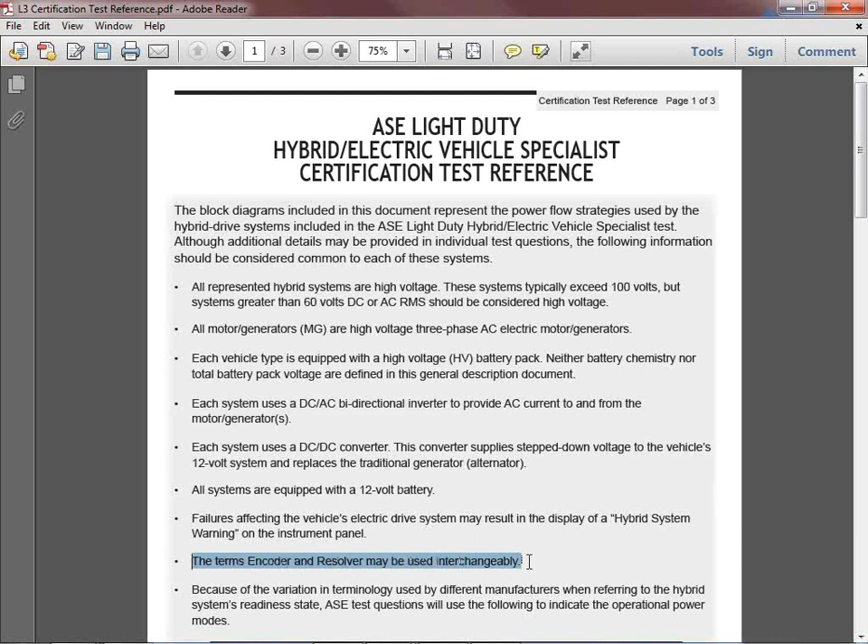Another standard that we realized during development was the fact that the terms encoder and resolver are sometimes used interchangeably because of the terminology among manufacturers. So we wanted to state that up front, that resolver and encoder may be used interchangeably when you see those in a test question.

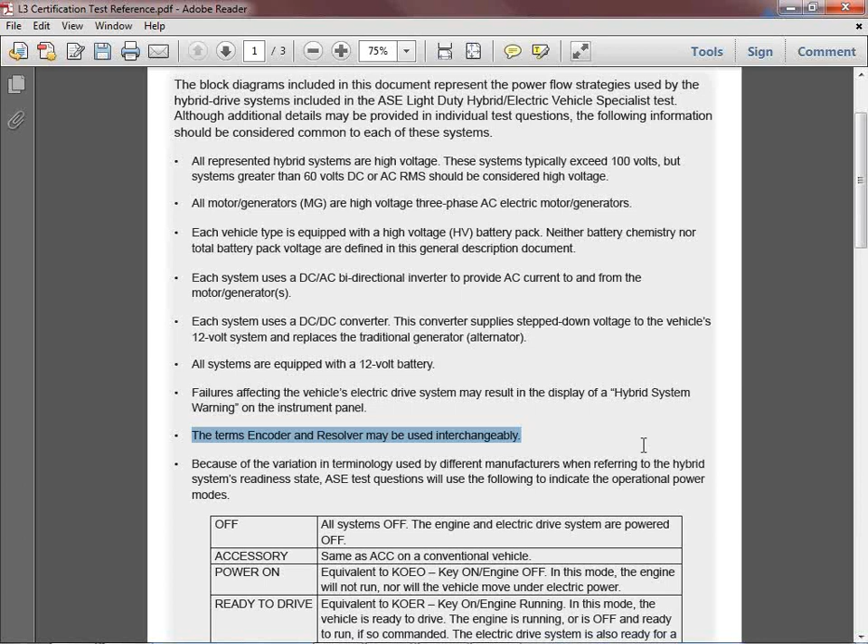Another great example of one of the challenges we faced, and I'm going to scroll down here so you can take a look at this table. This is a real good example of something that we faced that should have been fairly simple, but it wasn't so simple. The term 'ready' or 'ready on' is used differently by various manufacturers to identify the vehicle's operational power mode.

That mode is determined by, for lack of a better way to characterize it, the key position. Key on, engine off; key on, engine running. So what we had to do was put together a matrix and develop a standard to clarify this disparity, so that technicians taking the ASE test could understand what operational power mode the vehicle's in when we're making certain diagnoses of vehicles' problems in the test questions.

So what you see here are the terms that we're going to use in the ASE test. Off is off in this table - all systems are off, and the engine and electric drive system are powered off. Accessory is the same as an accessory in a conventional vehicle.

Now, power on, that's kind of equivalent to key on, engine off. In this mode, the engine will not run, nor will the vehicle move under electric power.

Our ready, or ready on, is ready to drive - that's how we're going to characterize the vehicle, and that's equivalent to key on, engine running. In this mode, the vehicle is ready to drive; either the engine is running or it's off and ready to run if so commanded. The electric drive system is also ready if a drive command is given.

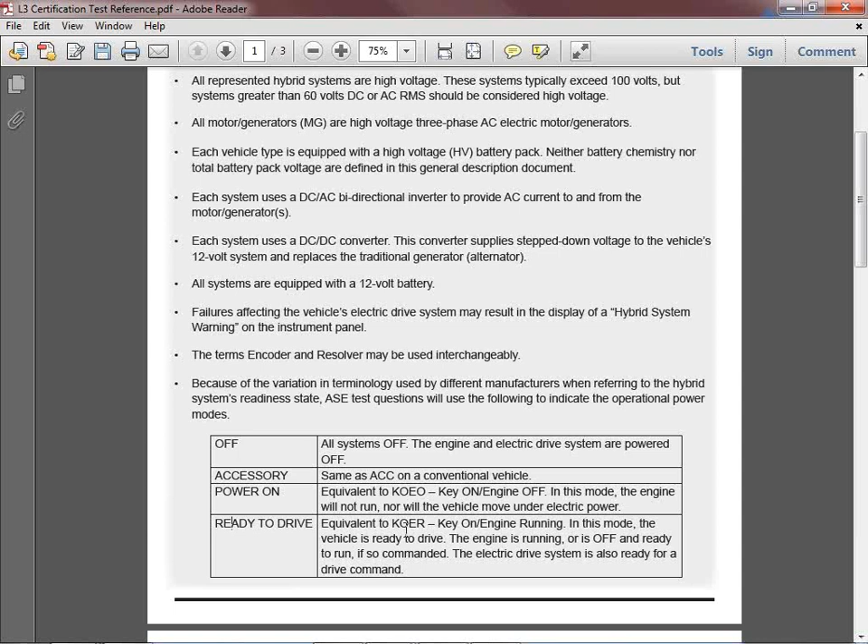Now, on page 2 - and again, this document's 3 pages, basically broken down in 3 parts - the second part of this are the block diagrams. These block diagrams serve as a visual reference and identify a classification for each of the vehicle platforms based on their technical characteristics.

Now, these classifications will be used in some of the test questions to define the hybrid vehicle type in the diagnostic or repair scenario, and that allows us to do that without calling out the name of the actual vehicle manufacturer. Technicians familiar with the hybrid technology should recognize the systems represented.

So if you were to read through the type 1 and look at this block diagram, you'd realize very quickly that, oh hey, that could apply to Toyota or Ford or even Nissan Altima. The idea is to give you a way to determine exactly what is a type 1 vehicle when ASE talks about it.

Now, one of the important things that I want everyone to understand is these block diagrams are in no way intended to offer you enough technical information about their operational characteristics in order to help you answer test questions - kind of like the composite vehicle reference booklet does for anyone that's taken the L1 or L2 test. These block diagrams simply identify the technical aspects for a given type of hybrid vehicle so you can understand which type of hybrid vehicle is represented if we cite a type of vehicle in a given test question.

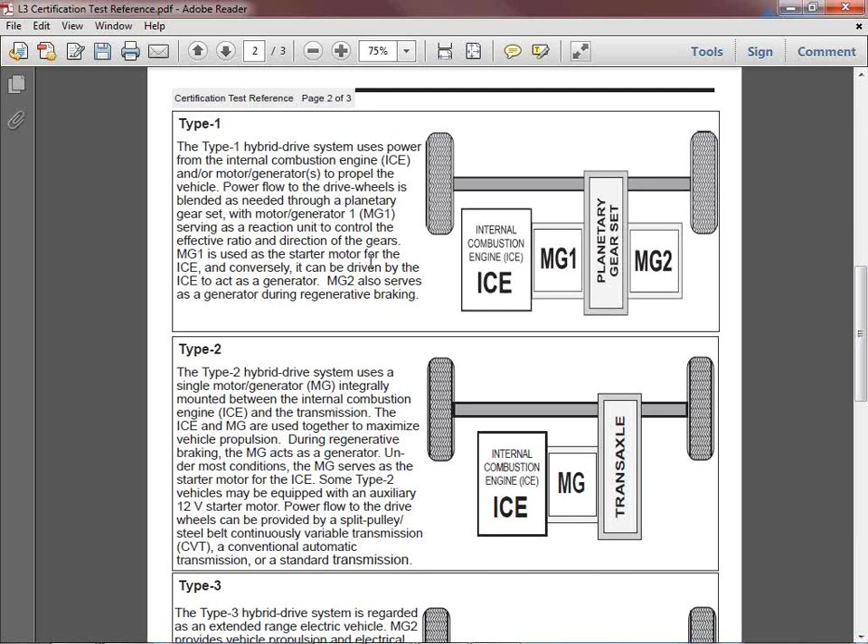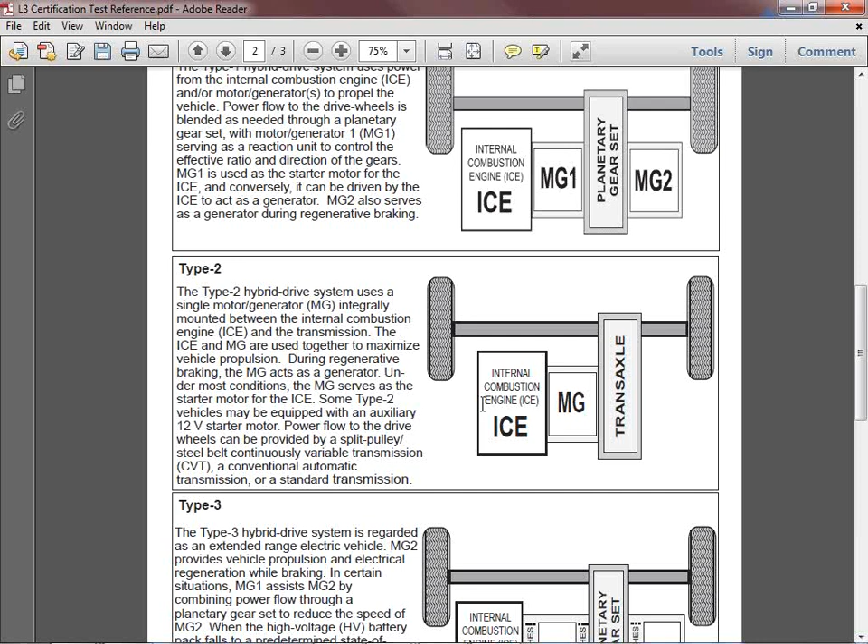But again, reading through type 1, I'm just going to give you a quick overview. Type 1 applies to Toyota, Ford, Nissan Altima, if you're familiar with those types. If you read through type 2 and look at the configuration, you'll see that's really an IMA-style Honda, Mercedes-Benz, BMW, and even Nissan is starting to use IMA as well. And then when you look at and read through Type 3, you'll see that really what we're referring to is the Chevy Volt - that type of hybrid configuration.

Now, what I want you to understand though is you will see mostly generic test questions. You'll see the majority of the questions will be generic on the test, meaning that the content will apply to most any type of hybrid vehicle. However, there will be some test questions - a sprinkling of them - that will only apply to one of these single types, which will be indicated in the test question.

So if you've taken ASE test questions, you would understand a scenario that I'm going to use right now. We'd create a test question that would read something like: the technician is diagnosing a motor generator failure on a Type 2 hybrid electric vehicle. So we've identified a diagnostic scenario that's specific to a Type 2 vehicle. That would require you to apply your knowledge of type 2 to that diagnostic scenario and arrive at a conclusion based on your overall knowledge of that type of diagnosis on a type 2.

There will also be questions that reference an illustration provided with the test question, which you'll use to diagnose the scenario, just like you've seen in other ASE tests. These illustrations will be hybrid scenarios, but they'll help level the playing field for all technicians taking the L3 test, using that illustration coupled with your knowledge of the subject matter to arrive at your diagnosis. So that's how that's going to work.

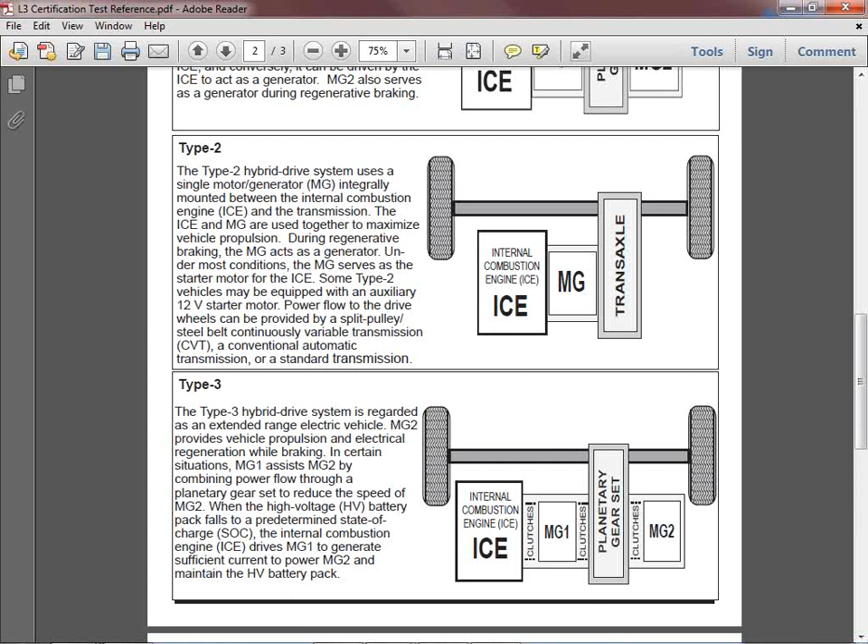The last part of the certification test reference document is a glossary of terms. The glossary can be used as a reference during testing in the event you encounter a term you don't clearly understand, primarily due to differences in how the term is used by various manufacturers. We compiled the terms in this glossary during our test question development, which was the best place to do it, because that's where we could best determine which terms technicians globally might struggle with.

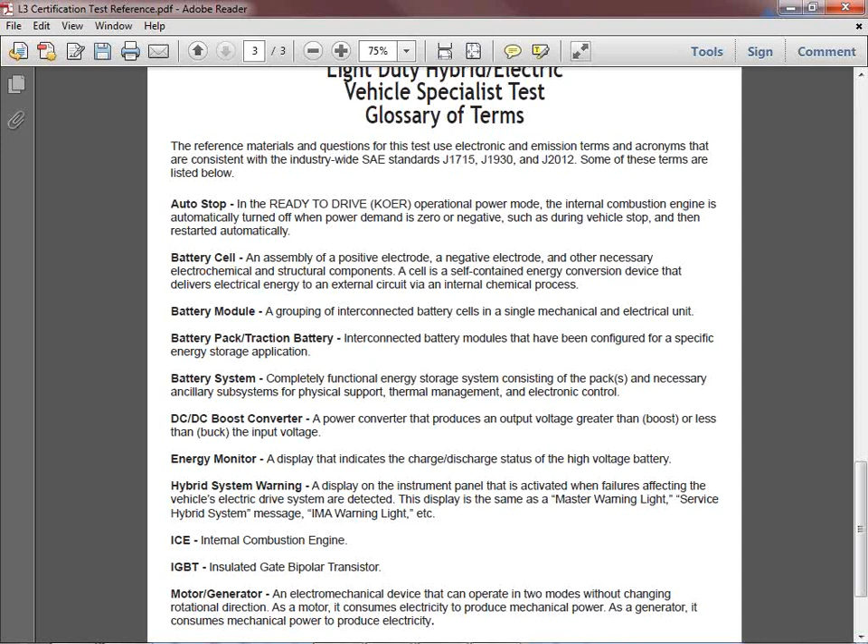So to help level the playing field for technicians taking this test, the certification test reference document will be available as a pop-up document in the computer-based testing user interface. It's also included in the official ASE L3 study guide, which I'll show you a little later and tell you how you can get your hands on one of them.

Now for test question content, I'll say we had great success writing generic questions that apply to the majority of manufacturers' hybrid vehicles. As I said, our subject matter experts concluded high voltage is high voltage, and whether it's 156 volts or 300 volts, it's all dangerous. The diagnostic and safety procedures are essentially similar for all manufacturers.

So as I already said, there'll be some type-specific questions included in the test, but the predominance will be generic. Just remember that all of the questions require the application of a high level of diagnosis and analysis skills, as should be the case for any advanced level test. So that's a little bit about the constructs of the test questions.

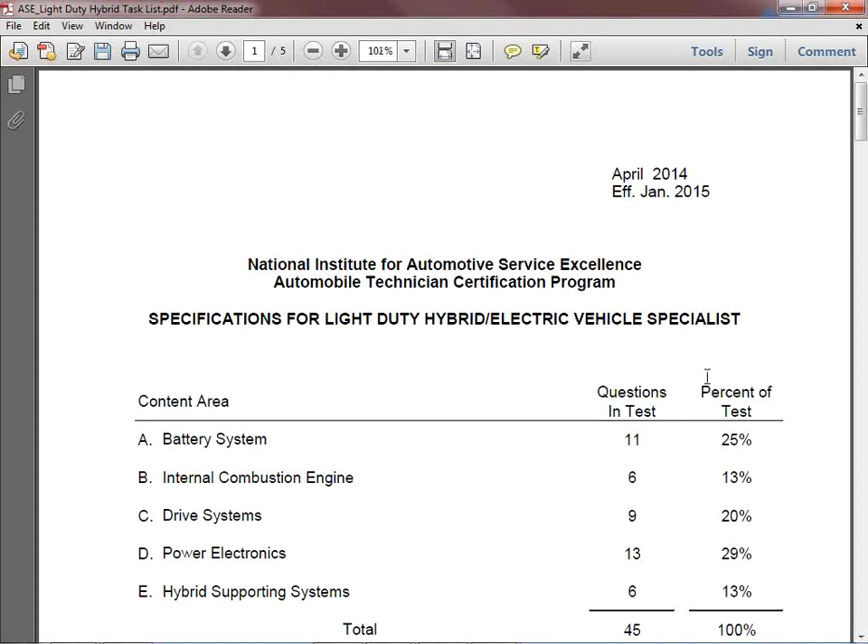Now let's take a look at the task list, and I want to go through this and give you some really good insight on how to use this task list to help with your test preparation efforts.

If you look at this first page, you'll see this is what we call the test specification, and anyone who's taken an ASE test knows that this kind of mimics your score report. With the test specification, we break the test down into general content areas, which identify a specific area of the test that has skills associated with it in diagnosis and repair, and we'll talk about those skills in a minute. In this test, we've broken it down into 5 content areas.

We have the battery system, the internal combustion engine, drive systems, power electronics, and hybrid supporting systems.

When this test goes fully operational, there will be 45 questions distributed across these content areas in this manner: 11 questions go to battery systems, 6 to internal combustion engine, 9 to drivetrain, 13 to power electronics, and 6 to hybrid supporting systems. Now isn't it ironic that when we focused on prevalent technology that makes hybrids the same, the 2 content areas that most affect that are the areas where we're going to apply the most questions. Just kind of makes sense that way.

It's important to note, though, the 45 questions applies to this test when it goes fully operational. Right now, we're offering the test in a pilot phase. The pilot test is being delivered starting January 1st, and it'll run through June. It's going to include 95 questions, with 3.5 hours of testing time allowed for completion of the pilot test and the 95 questions.

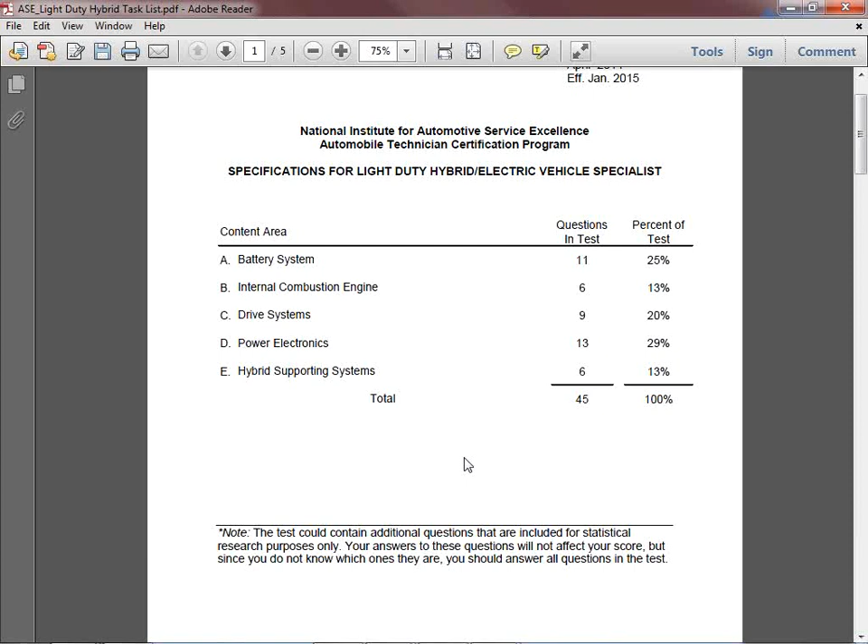Now what I want you to understand right now, we're going to talk a little bit more about that in detail in just a moment, but I want you to understand the information that's in a task list and how this information can help you better prepare yourself.

Now, what are tasks? When you look at each content area, like battery systems, within that content area we have 10 tasks. One of the things you'll notice with many content areas, primarily the ones dealing with the high voltage system, all but the internal combustion engine content area, the first 5 tasks are essentially the same. These are the safety tasks that apply to each area where you're working on high voltage.

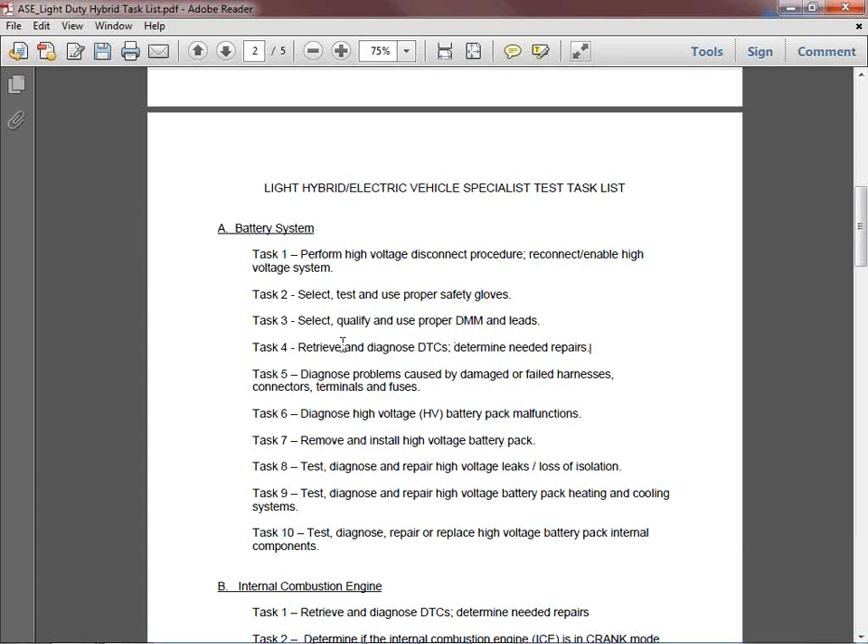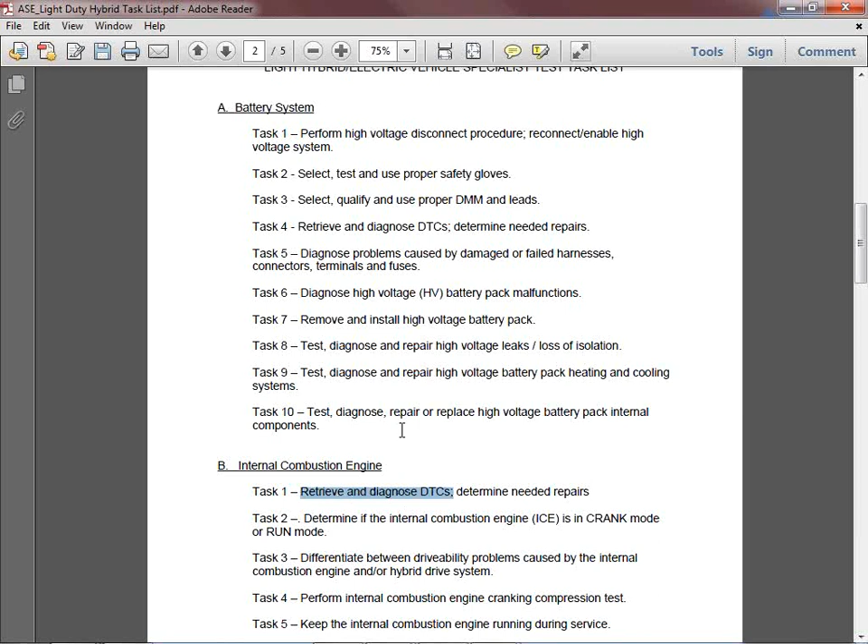Also, one of the common tasks is diagnostic trouble codes, because we could write a question about retrieving and diagnosing a diagnostic trouble code as it relates to the battery system, which would be different from retrieving and diagnosing one as it relates to the internal combustion engine. So when you see repetition of the task, there's a method to the madness here, each task really reflects the content that's going to be in that content area.

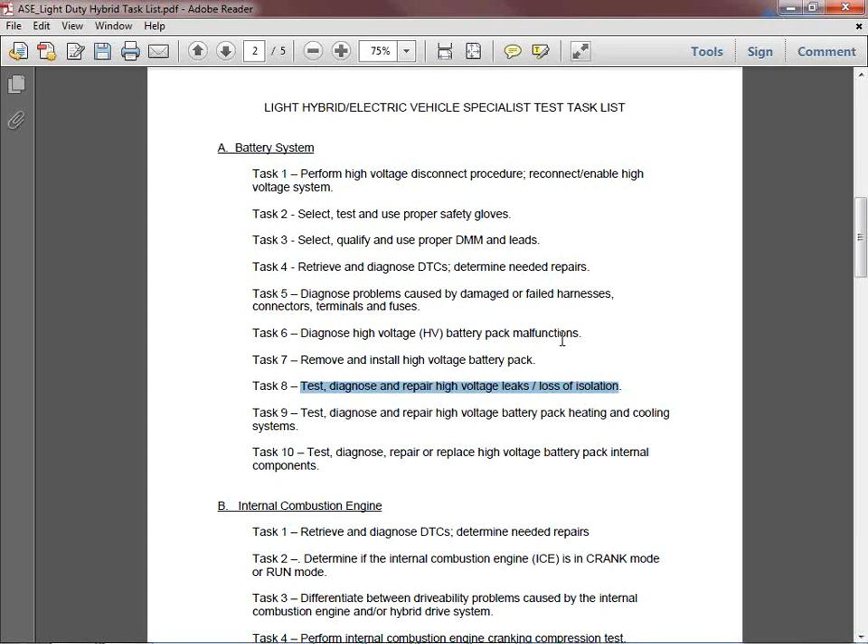So you need to get your head wrapped around the idea that there's multiple tasks, but what does that mean to this content area as it relates to battery systems? And most importantly, how much do I know about that? That's the key. Because if your self-evaluation says, wow, I don't know much about testing, diagnosing, and repairing high voltage leaks or loss of isolation, you've just identified a place where you probably need to brush up your skill set and get some experience. So the battery system, again, those 5 common tasks.

Now as we go through, we have tasks associated with the internal combustion engine. I want to point out just a couple of these. Again, as I mentioned, retrieving and diagnosing diagnostic trouble codes as it relates to the internal combustion engine is going to be specific to the ICE.

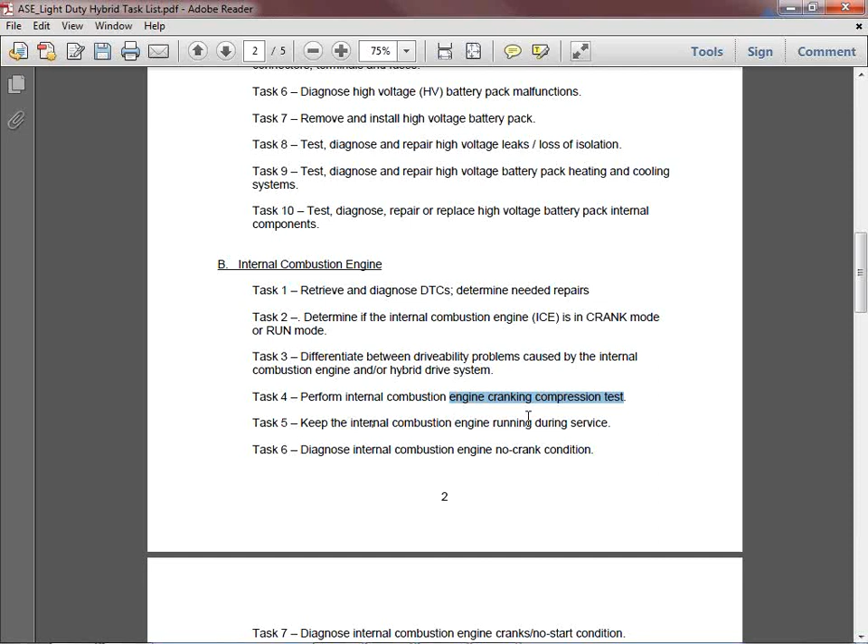There's a few tasks in here that you can go through and figure out whether you have a strength of knowledge in those areas: cranking compression test, checking and keeping the internal combustion engine running during service, diagnosing internal combustion engine no-crank conditions. One of the things I wanted to point out, interpret vacuum and compression readings on Atkinson cycle engines.

Okay, wow, what does that mean? Well, vacuum and compression readings on Atkinson cycle engines are different, and if you didn't know that, I just pointed out something you probably want to brush up on, because you might see a question about that on the test.

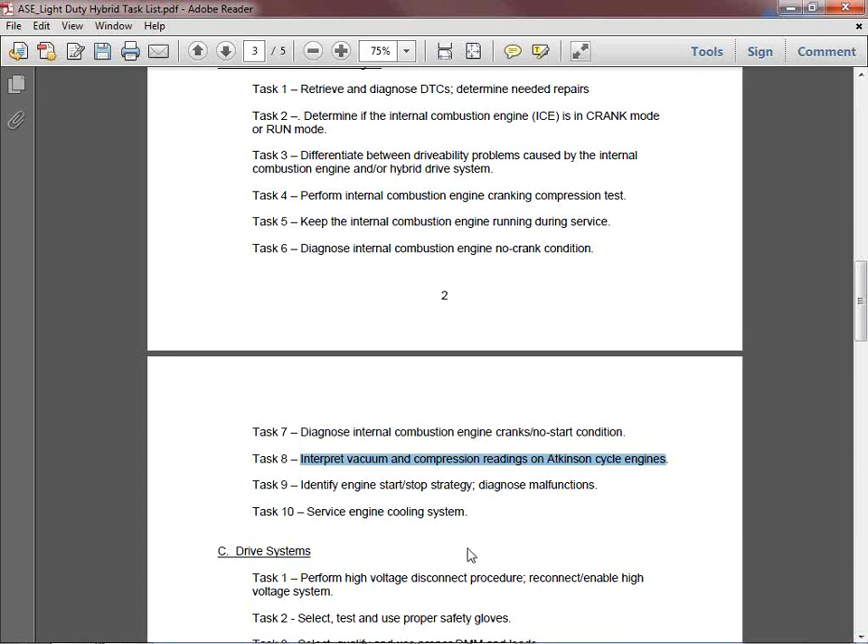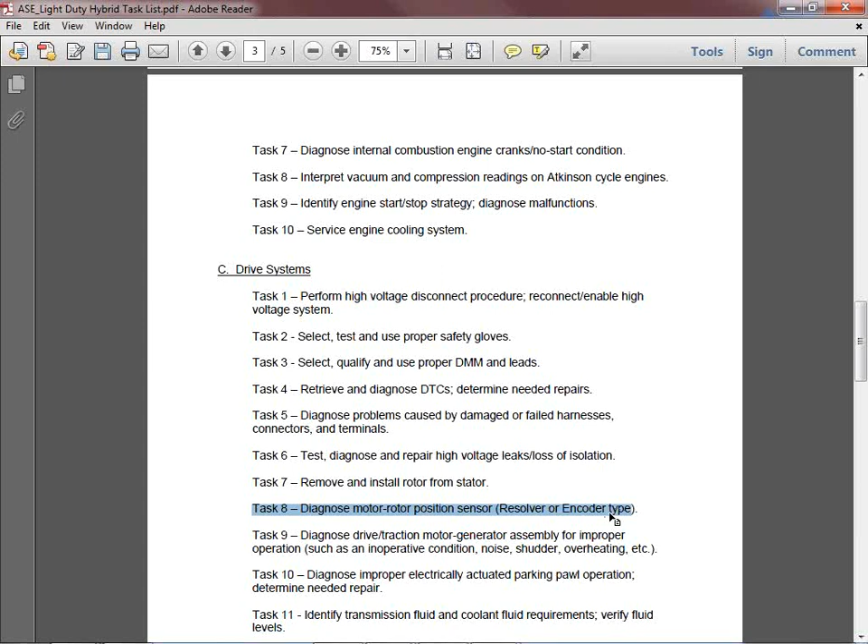Moving on to drive systems, the first 5 tasks in that task list are essentially similar to the battery system. We've got one task that reads diagnose motor rotor position sensor, resolver, encoder. That's that interchangeability of terminology we talked about already, and I wanted to point out how it might apply in a diagnostic scenario for a question we might give you. There are tasks covering all of the diagnosis and repair scenarios and skills that we as technicians should know and understand when working on the drive system.

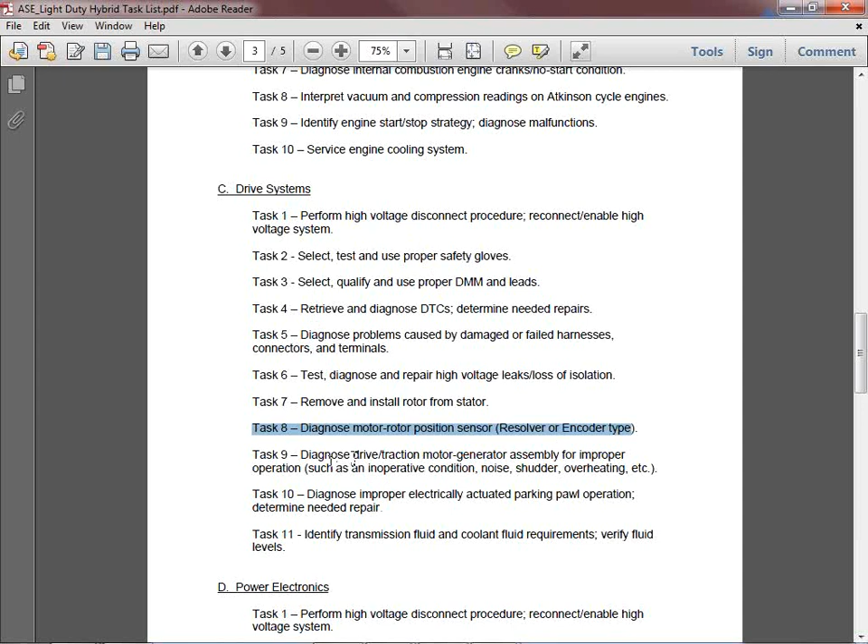Again, power electronics - the first 5 tasks there are essentially similar. This is one of the skills I wanted to point out, because this is where we get into that operational power mode that we talked about. Of course, we could be using the operational power modes in other content areas where we're diagnosing a problem that occurred in the power-on mode, or the ready-to-drive mode.

But this is an actual skill that reflects back to that table I showed you in the certification test reference document, and how it applies to the skills in the task list that the questions in the test are going to relate to.

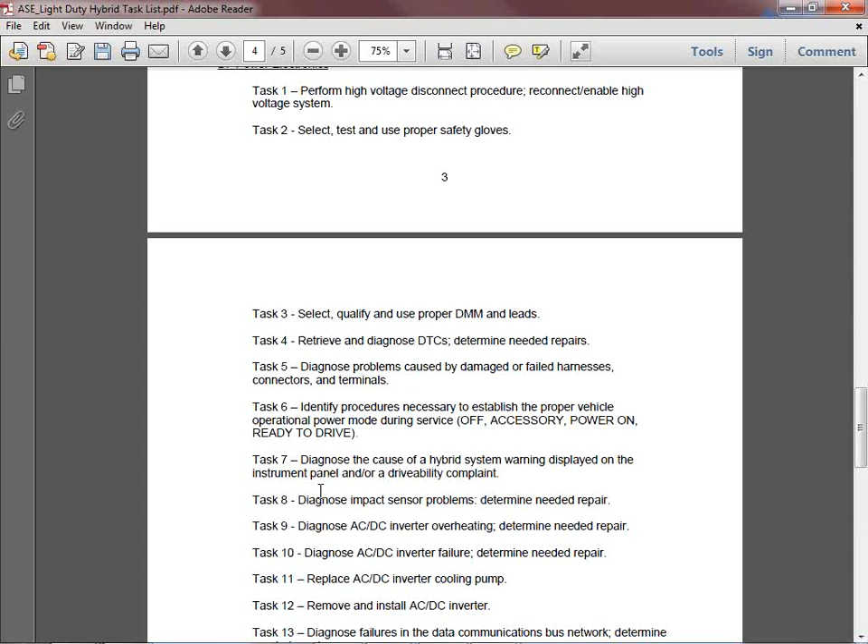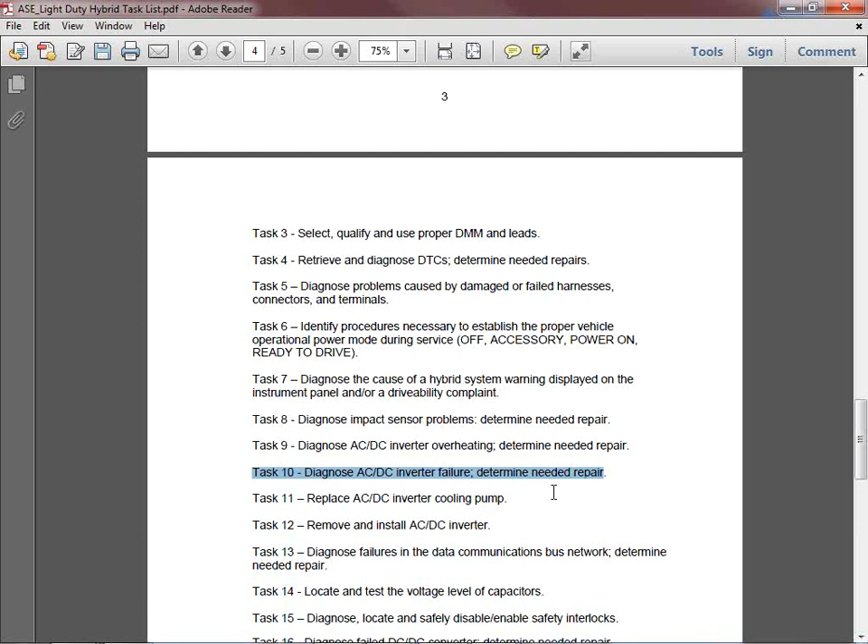A couple other tasks to point out here, just as flavoring: diagnose AC/DC inverter failure, which we talked about in the concepts of the certification test reference document - so again, how that parallels to the content of the test. Down here, diagnose failed DC-DC converter. So the idea here, and then last but not least, the hybrid supporting systems.

We've got the same 5 initial tasks, but there are a few tasks here I wanted to point out to you as well. Task 9 talks about removing and installing the high voltage air conditioning compressor, and identifying and selecting the proper system oil.

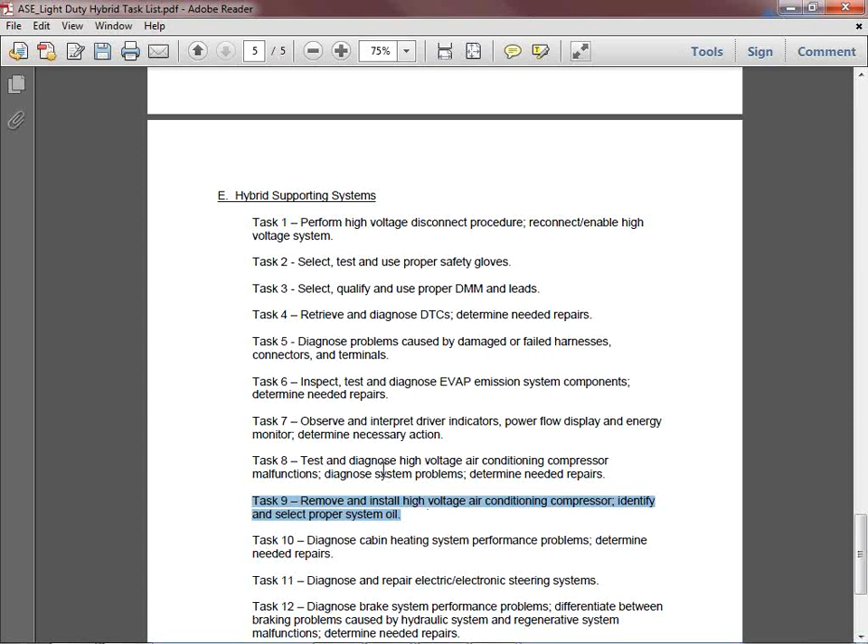If you don't know why proper system oil is so important to a hybrid vehicle, that's something else you want to study up on and learn. This task also covers testing and diagnosing high voltage air conditioning compressor malfunctions and diagnosing system problems. This is where we'll catch those hybrid supporting systems and ask you questions about that during the test.

We also have content about brake system performance problems, having to differentiate between problems caused by the base hydraulic brake system versus regenerative system malfunctions, and determining what remedies or solutions we have to come up with for a repair.

The idea here is really to use the task list and the certification test reference document as a benchmark for your own individual knowledge of the overall test content and how you feel about it, because you yourself are the best judge of what you know and don't know. What ASE can do is give you a tool to identify that test content and do your own evaluation, so you can hone your study time to the specific skills you need, and then find good study material to get you there.

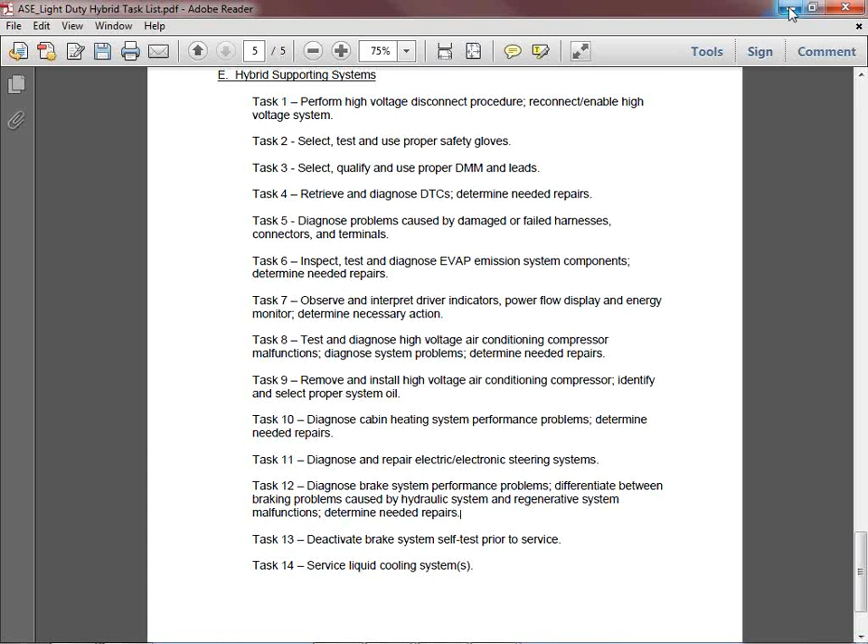So use the task list as a benchmark, and that's really going to be key. I'll reinforce that here in just a little bit.

Since this is an advanced level test, we really had to consider whether there should be a prerequisite requirement, as we have with the L1 and L2 advanced level tests, and if so, what prerequisites would be appropriate. In considering this decision, ASE staff facilitated meetings with subject matter experts and directed them to consider what other tests in the automobile technician series would include skills fundamental to those identified in the new L3 task list - essentially, what diagnosis and repair 101 tests would be the prerequisite to get you to the next level to take this advanced test.

With this level of clarity, the overwhelming consensus was to require both the A6 Automobile Electrical Electronic Systems test and the A8 Engine Performance test, both from the Automobile Technician series. So the A6 and A8 tests are the prerequisites.

I want to make a point about prerequisite requirements because ASE did just change them. It used to be that your prerequisites had to be currently certified - meaning your A6 and A8 would have to be current in order for you to register and take this L3 test. We've changed our requirements to say now you only have to have been previously certified. That means your A6 and/or A8 can be expired, and we will still allow you to register and take the L3 test without having them current.

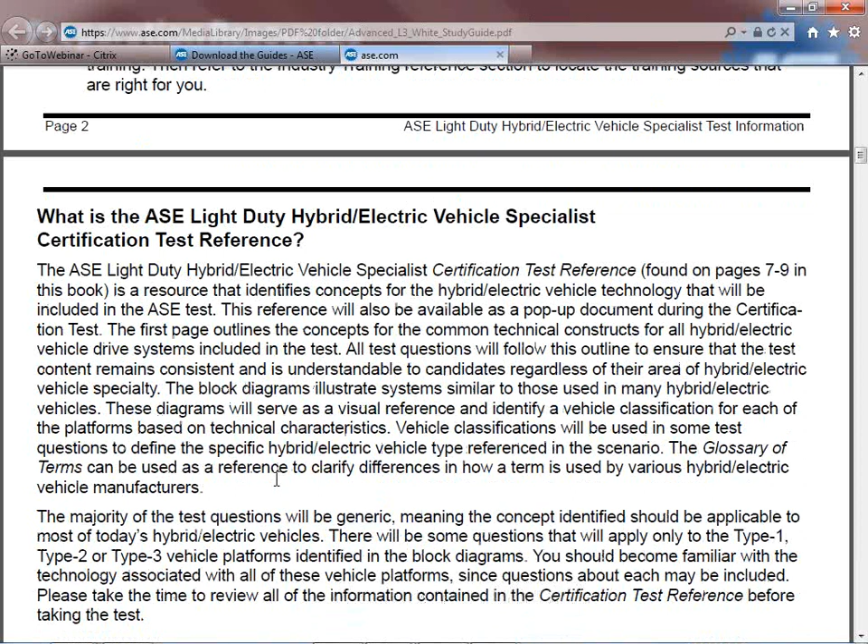How do I prepare? We're going to give you a little bit of information there. A good outline again of what I've talked about, what is the hybrid electric vehicle certification test reference document, what is it, what is it for, and some tips about what to do before the test.

Now this shows that the L3 test, when it goes fully operational, is going to be 55 questions. Now I know you're saying, well John, you already said it's going to be 45. Remember, in every ASE test we include some questions that are not considered for score. That's how we introduce new material in future tests as technology changes. It's paramount to keep our ASE certification program going. So we do include a handful of non-scored questions that, again, we're proving to make sure that they're valid for making pass-fail decisions before we ever use them to make a pass-fail decision for you trying to earn the credential.

Again, the number of questions in the test time is with an asterisk because we talk about the 95 question, 3.5-hour pilot test. Results will not be provided at the test center. We say they're available at the close of the spring testing window. We're going to under promise and over deliver. We found a way to be able to probably beat that. The spring testing window really doesn't close until much later than mid-April.

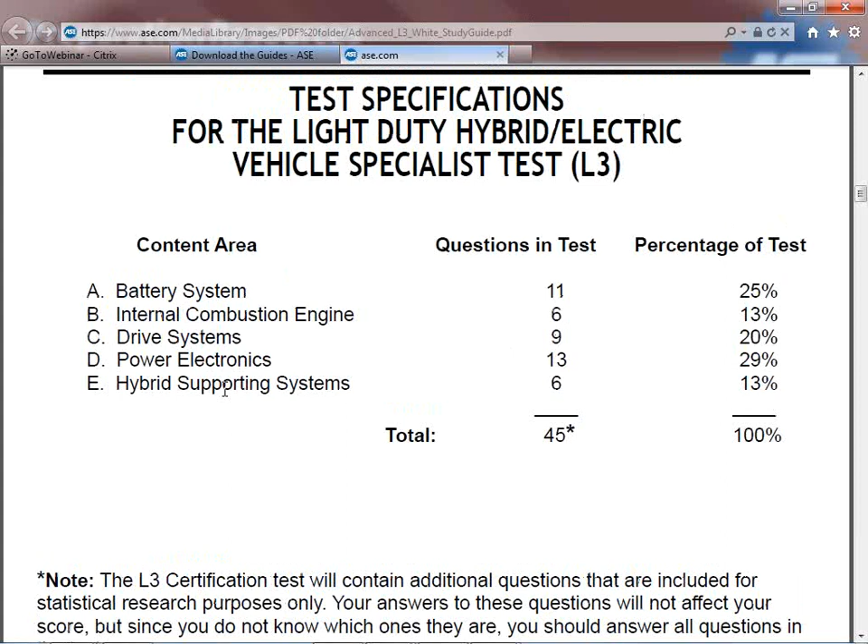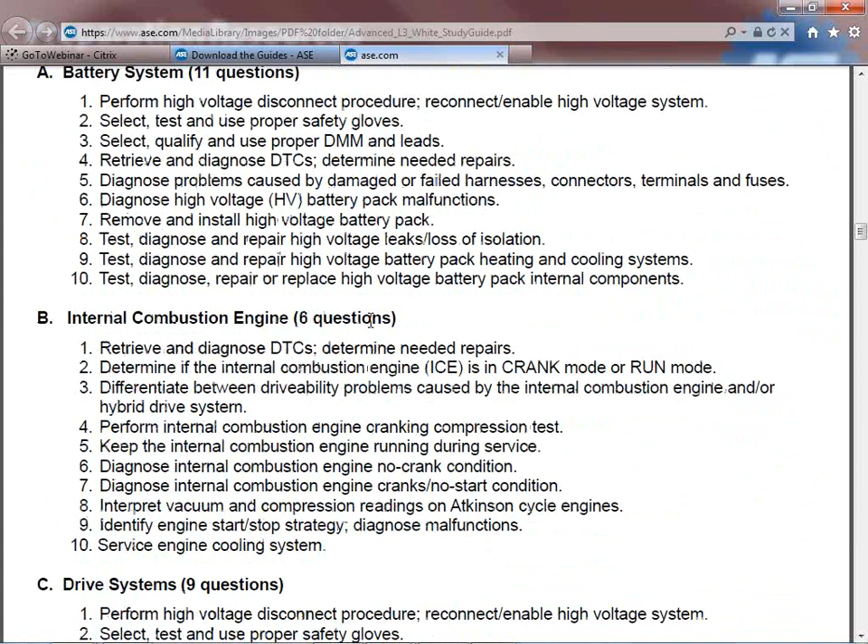So a little bit of tips on what to do at the test center. Again, you should recognize this, a little different format. This is the task list, which we've talked about, the test specification, identifying the content areas and the number of questions, the task list and the skill set that we've already talked about, which you have at your ready to do your self-evaluation to determine what you know and don't know about the test content.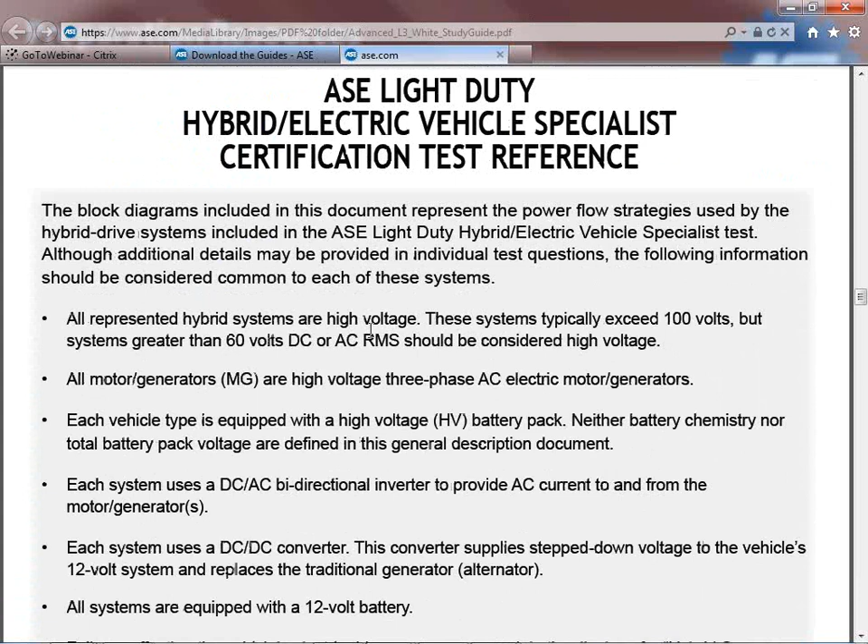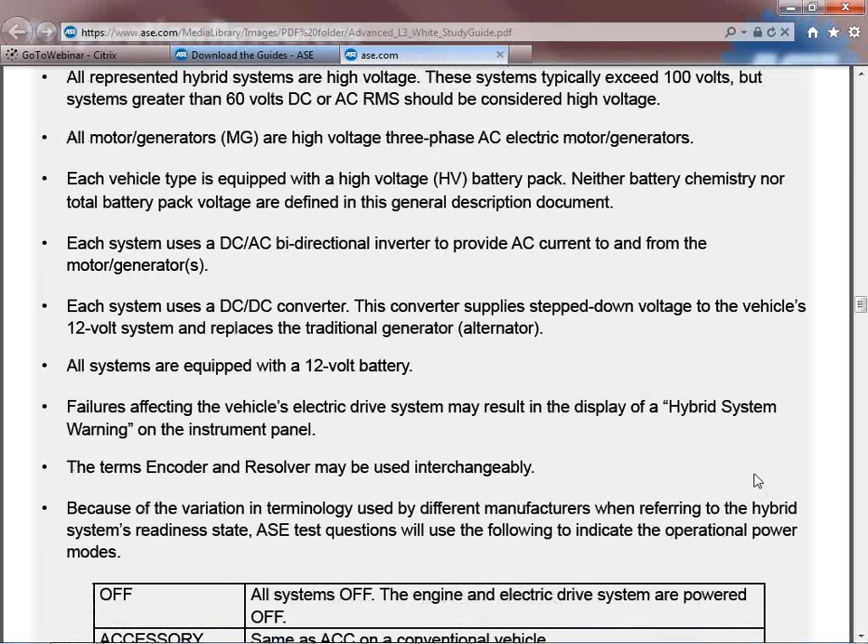A copy of the certification test reference document, again, so that you can become familiar with all the constructs of the types of things that we are going to cover in this test. Everything is in this outline, ladies and gentlemen. This will help you understand exactly what type of content will be on this test and how it's outlined. Again, the 3 pages of certification test reference document, the block diagrams, and the glossary of terms.

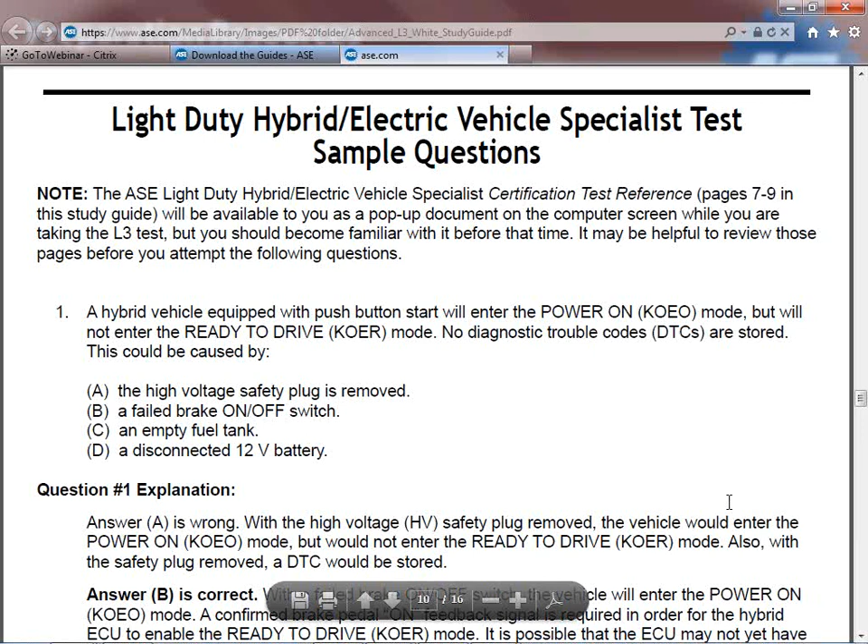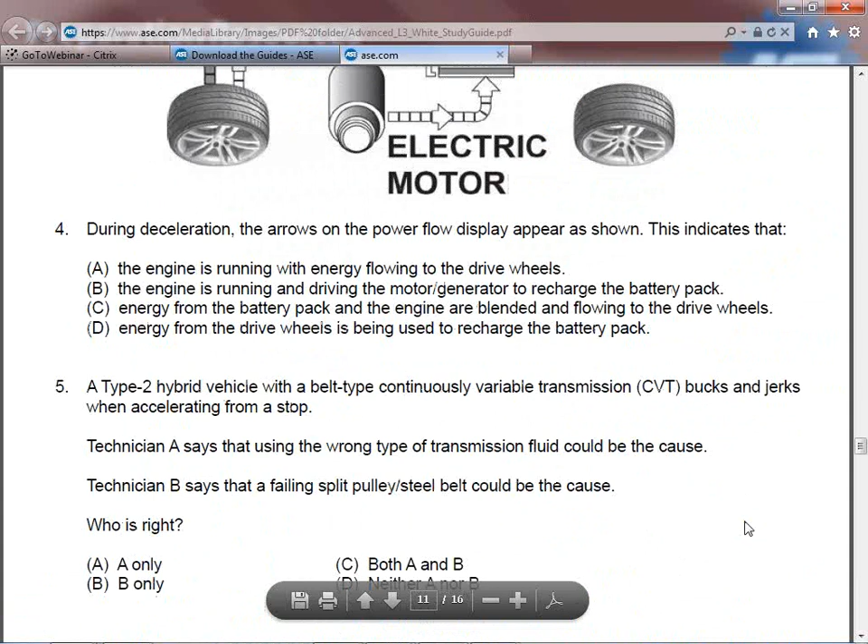One of the additional things you'll find in this study guide are some sample questions. Brand new test. Nobody's ever seen a hybrid ASE hybrid electric vehicle test question, so we've given you some examples here to look at to get a taste or a flavor of the type of questions that you might see when you come in and take this test. So there's a good handful of these questions here for your perusal and just to become familiar with its different styles.

And that's about it for the study guide.

So what should we do to get ready for testing? Just as a recap, use the task list as your benchmark. Remember, that's the best way to look yourself in the mirror and say, what do I know and don't know about the skills ASE has identified that will be reflected by questions in the test. The task list is the best first place to start.

Familiarize yourself with the certification test reference document. I can't stress that enough—it gives you a good outline of the content you're going to see in this test. Use the training resources in the study guide as options for skills enhancement. Again, contact those folks and find out if they have anything that'll help you. I'm sure you also have other resources through your employers and so forth.